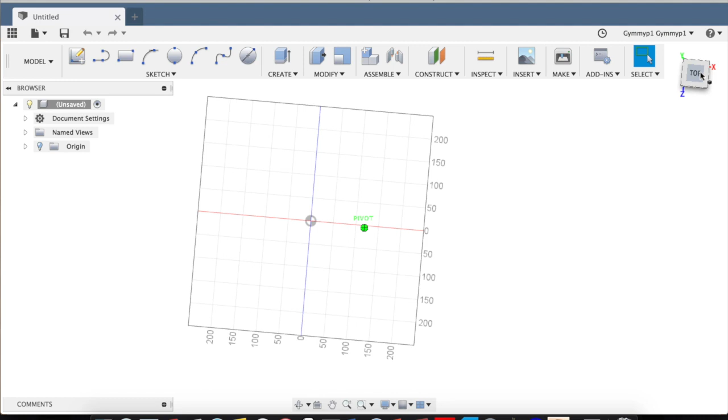So what I did was go on Kamui Cosplay's YouTube videos and take screenshots of the close-ups of her armor. So somehow we need to get the image of the armor piece that we need to make on here, so we can just trace out the shape.

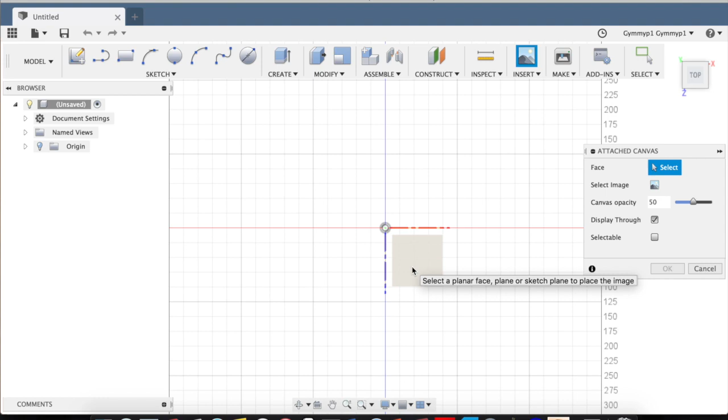So what you can do is go up here to Insert, and then Attached Canvas, and then you select which dimension you want it on, or plane. So I usually just do it from the top here, and then you go to Select Image, and I have it under my pictures, and then I have a whole folder full of these.

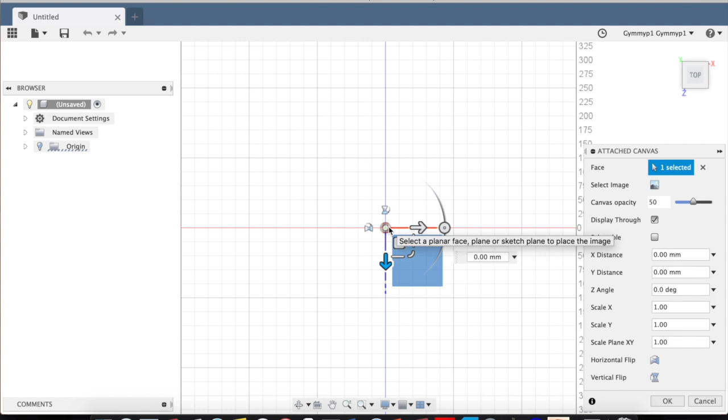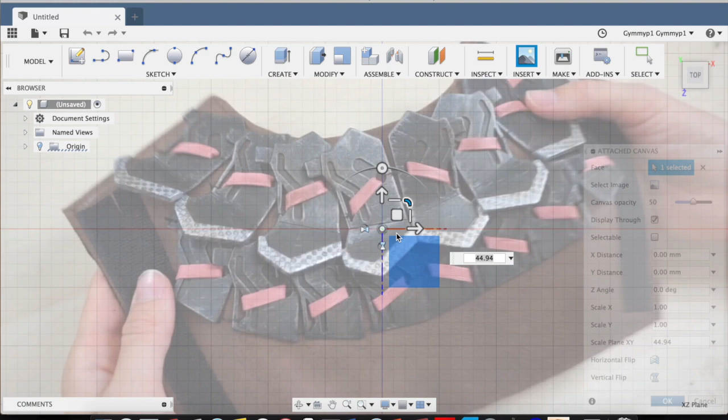So let's start, I started with the neck piece, because it was fairly easy to do. So you can see our image is right here. Usually I have to rotate it to be facing the right way. And then I use this little diagonal button to expand it larger. So from here, you can either decide to scale it to what you want, or you can just blow up the picture big and model on that, and then scale the piece afterwards, which is what I did. It's probably not the best idea, but it works in the end. So once we got that, just do OK. And now we have a picture to model directly on.

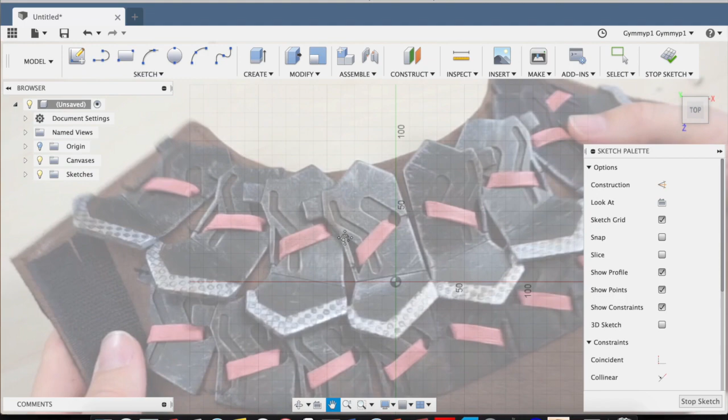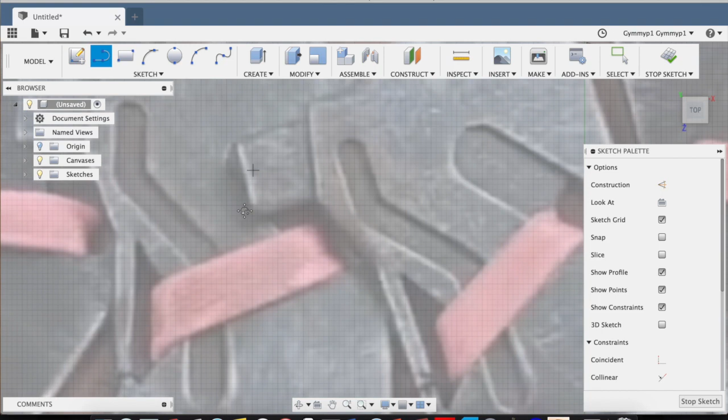So now what we want to do is trace out the 2D image of what we want. So go up here to Create Sketch. We want it on this plane. And then I'm going to zoom in on here. So we have several tools, the line, rectangles, circles, arcs, everything you could need. Spline is helpful for like freeform curves. But for here, I'm just going to do a line since this piece has very straight edges.

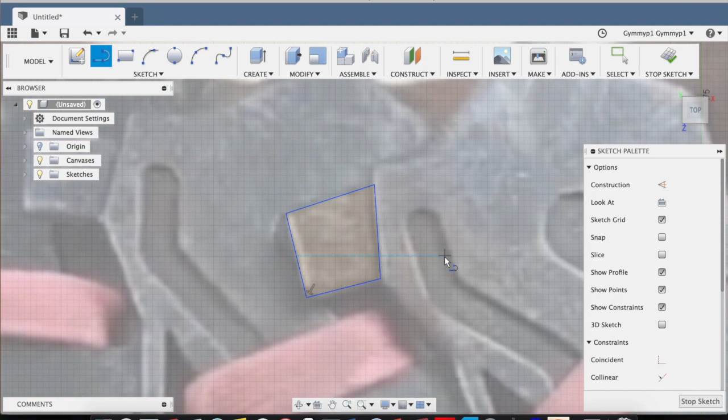So what I'm going to do here is just trace out the image here, and as you can tell, this is open-ended and it'll not show anything, but once we close it, it turns orange. And that's what we can, it's called extrude. It's turning this 2D shape into the 3D shape, like giving it height. So here we're just gonna continue to trace this out.

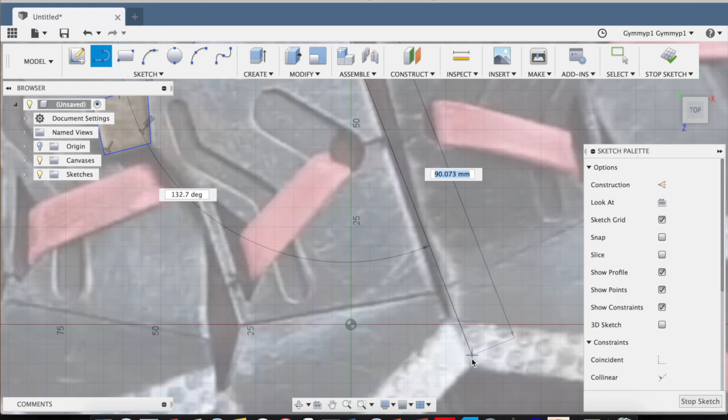And it's okay if it's not completely perfect. You can kind of tweak things later. And do that.

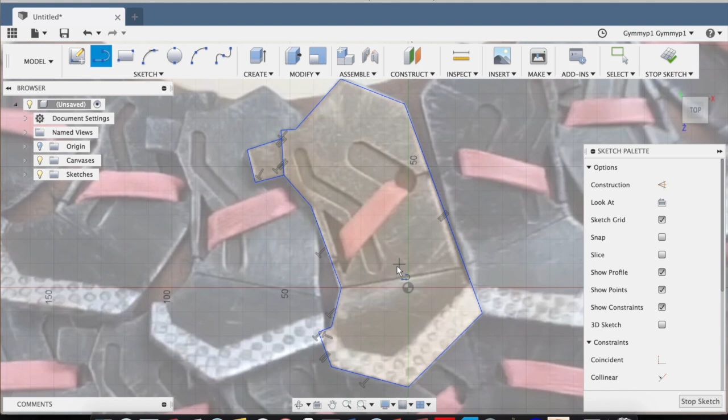And then that is a closed shape. That's why it turned orange. So you can do stop sketch. And this is just our basic shape.

But what I'm gonna do is go back into the sketch. So here is where all your sketches are, and that highlights which one. And then we right click on it and then edit sketch.

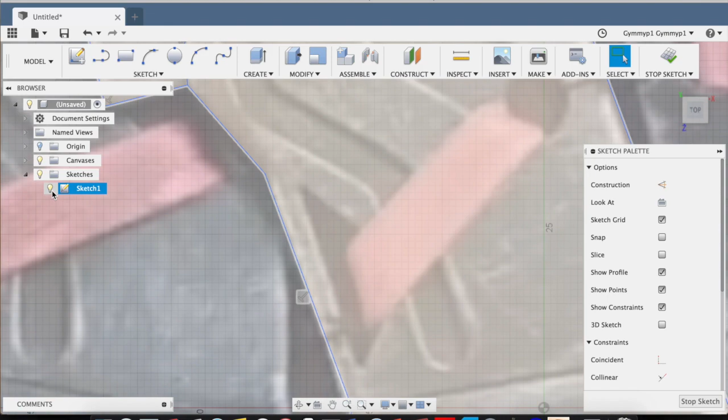So now what I wanna do is, I'm gonna turn that off, is outline all these indents and holes. So I'm just gonna, I need that on so I can connect that.

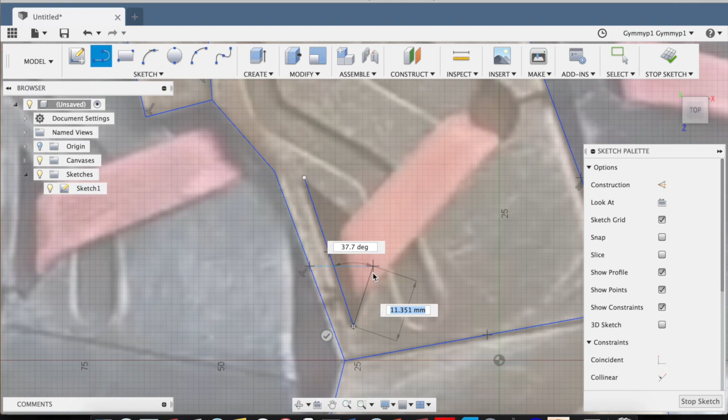I need that line. I need this hole. I'm just kind of guessing here, but that's just gonna be covered up anyway. And close that.

Let's see, I'll do that later. I'm gonna do a line right there. Oh, and if you need to escape, if you need to cancel that line, just press escape. Do that.

And just kind of fill in wherever you see straight lines.

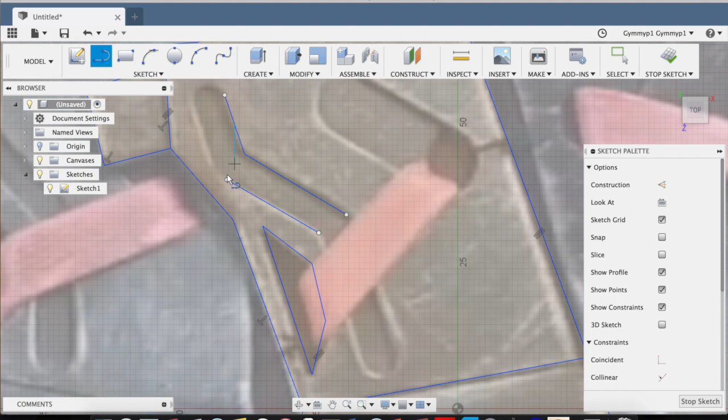Oh, this is riveting. Riveting material.

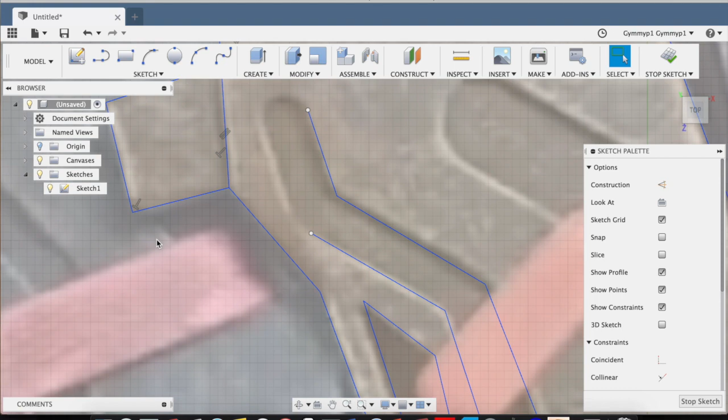It's kind of a tedious process, but once you've done it, it's done, and you don't have to worry about it anymore. And what is also awesome about this costume is that once you've done one piece, you can just flip it, and that's the other piece, because there's like mirrors of each piece, so everything's symmetrical.

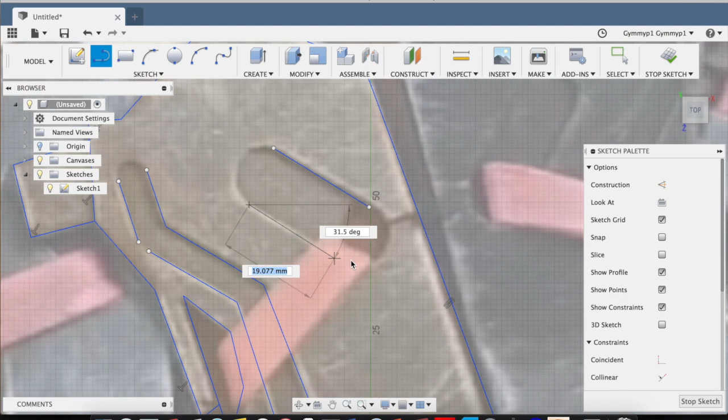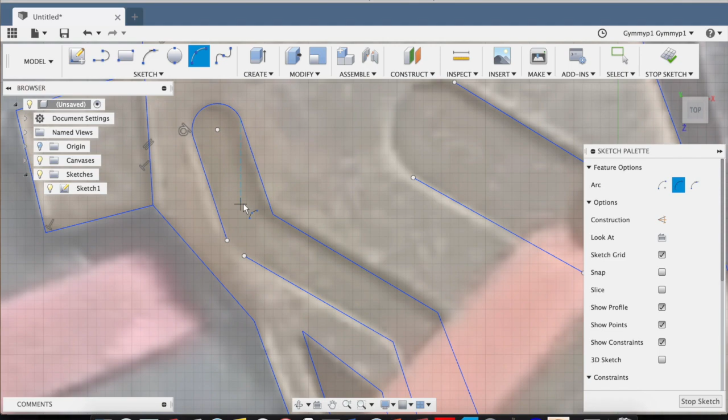Okay, so now what we need to fill in is these curves right here. So what I'm gonna do is the 3-point arc. So you select your first point, your second point, and then you drag it open to determine the direction of your arc. So this one might work here.

Yeah, I'm just gonna do that. And then I need one here.

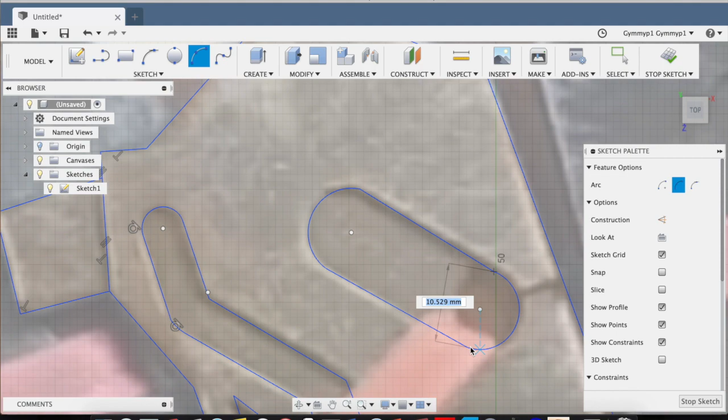Here, let's see. I could either do a circle or 2 arcs. I'm just gonna do 2 arcs since I'm already in the tool. I'll do one here, here, and do that.

And then I saved that line so I can directly connect it here. Let's see, and then we need an arc here.

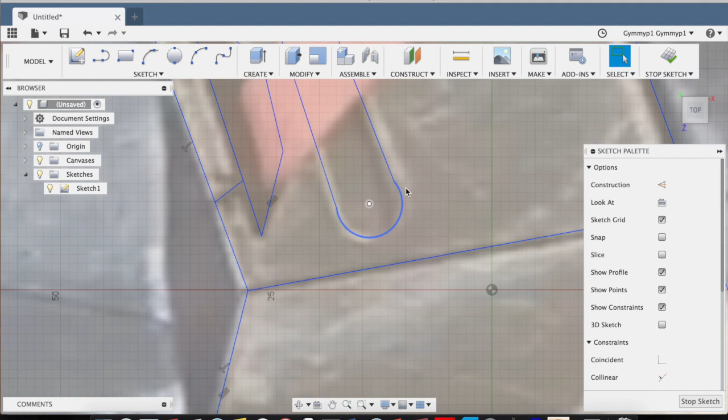Oh, that looks kind of wonky. So if you end up doing something like that, you can either undo or you can just drag this little point and kind of fix it up so it's not lumpy.

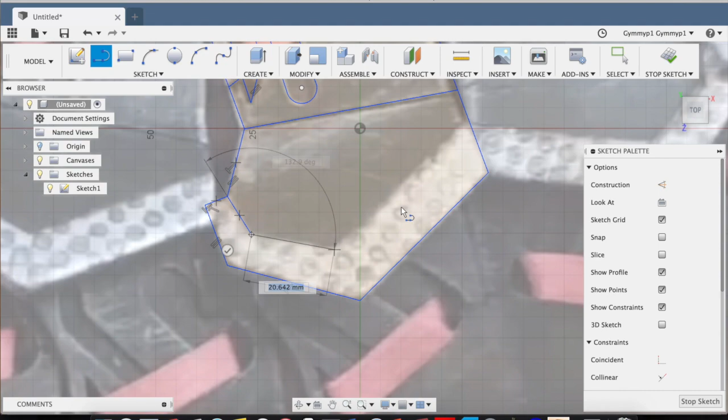Yeah. Let's see. Okay, so now we need to make this little part, which is raised. So I'm just going to do lines here again. Here, and then connect that over there.

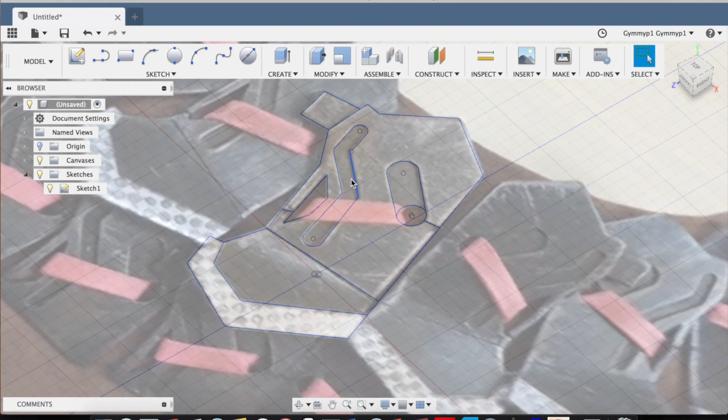All right, so that's our shape. We can go stop sketch. And now when we extrude, which is turning this flat shape into a 3D shape, it will come out properly and like have the holes cut out and everything already.

So what we want to do is click on one of these where it highlights it, and then press E for extrude. And then you can see this little arrow. You can just drag it up, and there is your 3D piece.

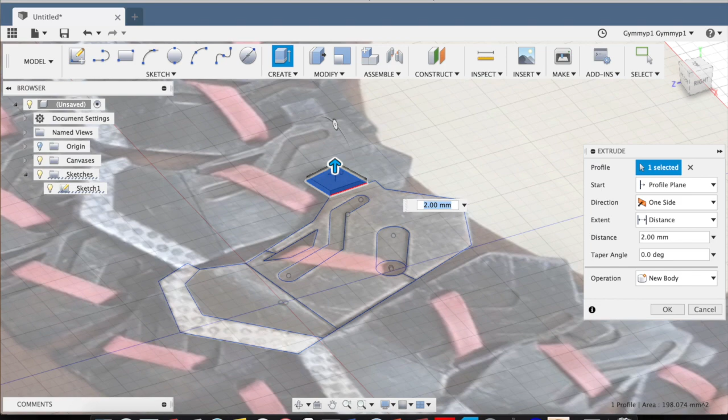So that's probably too thick. You can just go over here and do like, I don't know, 2. That is kind of a lower piece. If you look at the reference picture, that is kind of below this main piece. So we want that to be a little shorter.

So just do OK, new body. You have all these different options for more advanced stuff, but I didn't really bother with that. So I'm going to do OK.

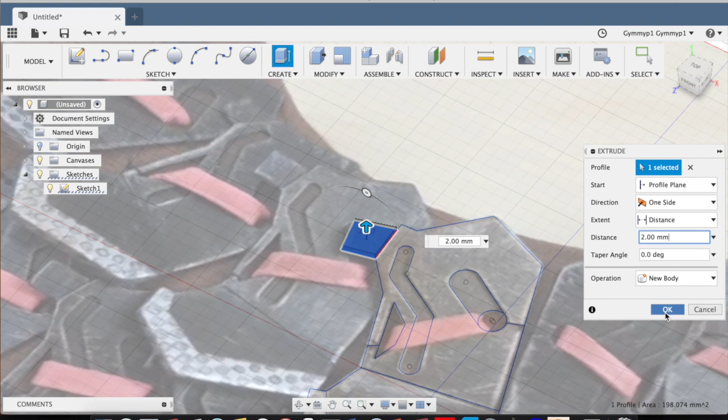And then you notice how the sketch goes away. You can just click the bulb and there's the sketch again. So we want to do, let's see.

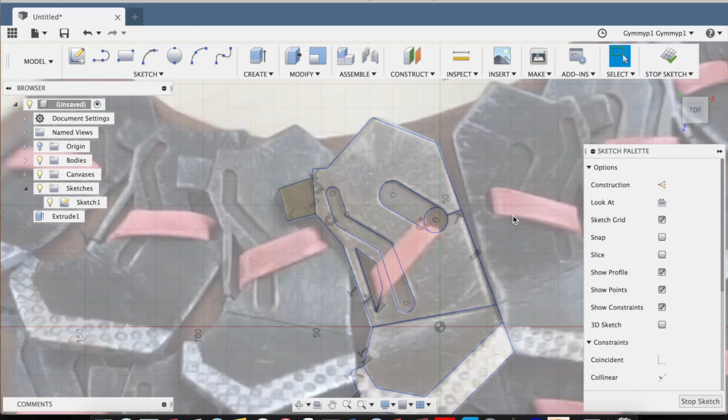Oh, okay, I forgot to add a line. Whoops. So I'm going to do edit sketch because this is a raised area right here, but the problem was that there's not a line right here. So I'm going to go ahead and stick that line in so it can be a raised section. Do this right here.

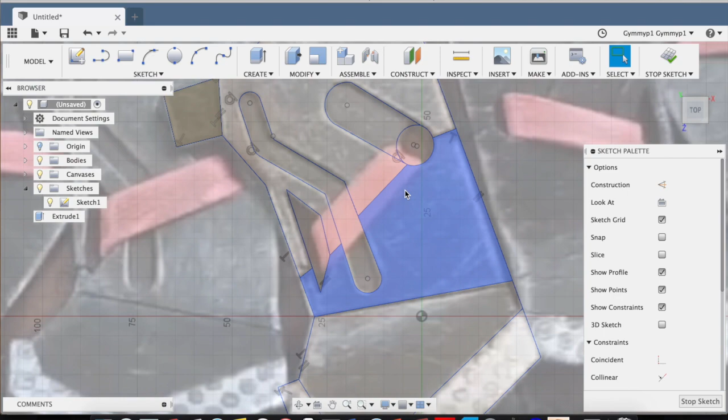And it can kind of go wherever since it's going to be covered up by that ribbon. So now it has those two sections.

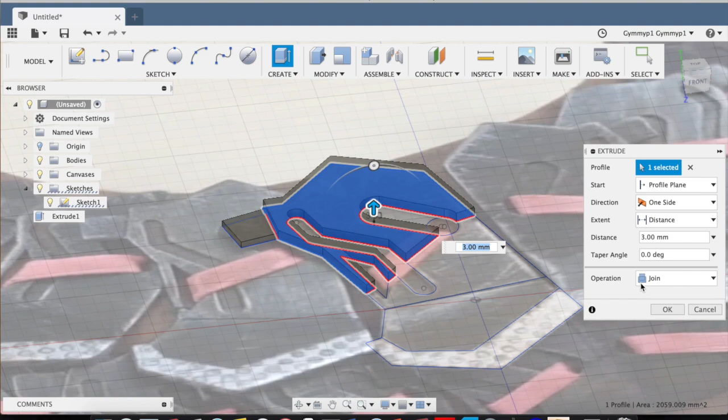So this one we want it to be a little higher. Click that region and then press E to extrude and drag it up. Even that looks a little too much. So let's see what 3 is. That looks about right. And then here it says join—we want to join because this is all going to be one piece. So I'm going to do OK.

This and this need to be the same height, so do the same thing again. You can also just go down here. This is going to be a little shorter than that other one, so I'm going to do like 2.5. That might be a little too close. So let's do 2. That looks about right.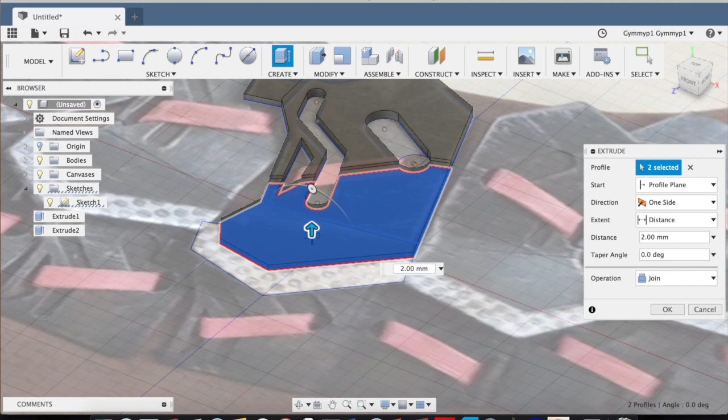And then this one needs to be the highest piece. So like maybe, what do we do on that other one? Okay, so that looks pretty good.

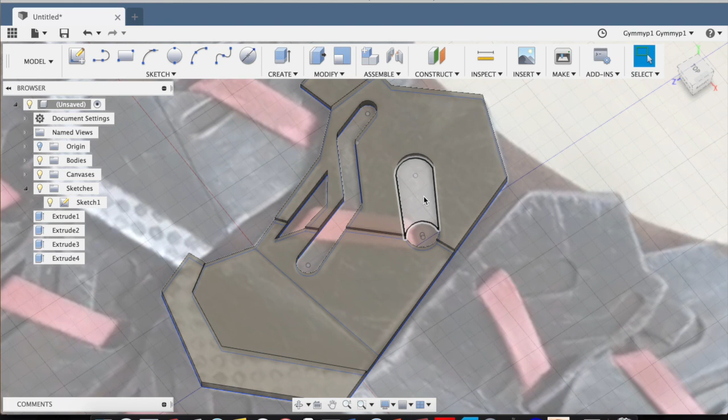I'll let that join. And these right here, so that was a hole—this right here is an indentation, and this is an indentation. So you can just select both of them, doing control and then click, or whatever it is on Windows, and then I have a Mac, so I do command and click multiple regions and just do that.

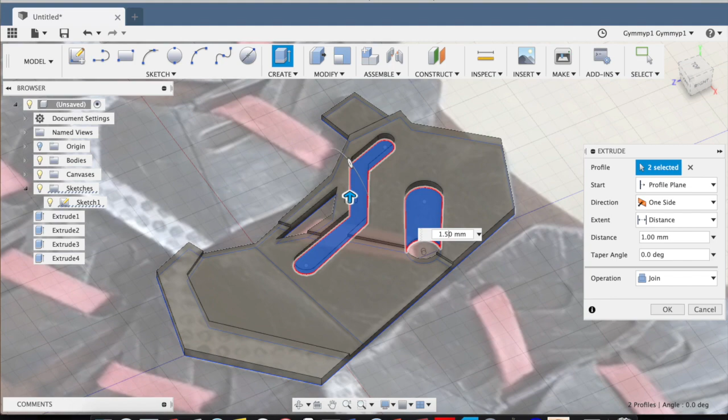Just try like 1.5. And once you've extruded that area, you can shrink it down or you can raise it up a little more too. So that looks like what we want.

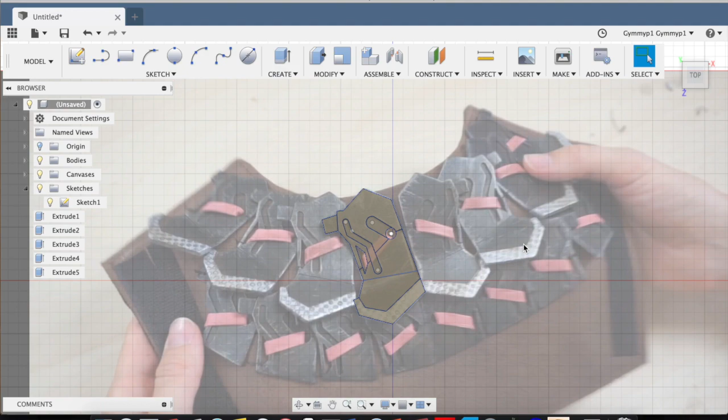Okay, so if you notice in the picture, if I get it oriented right, it looks like this part has an angle where it's kind of coming off, like where it's raised. And this, our piece right here, is completely flat. It's not fat, it's flat.

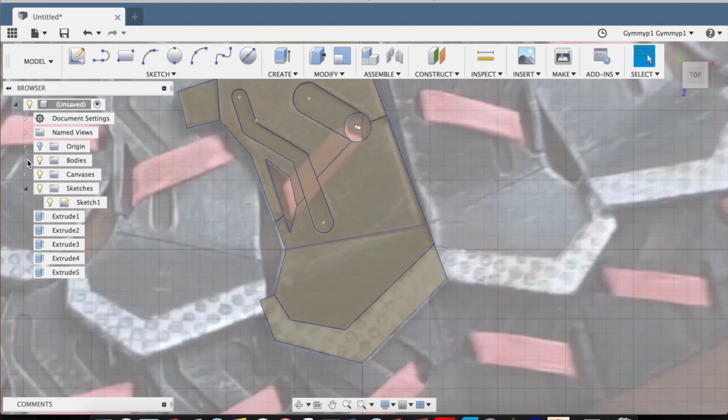So I have kind of a cheaty way of bending the pieces that I needed. What we want to do is a split body, which is under Modify and Split Body. But first we need to define at what line we want this split to happen. So we know this 3D piece is under bodies now, so just turn that off, and there's our sketch again.

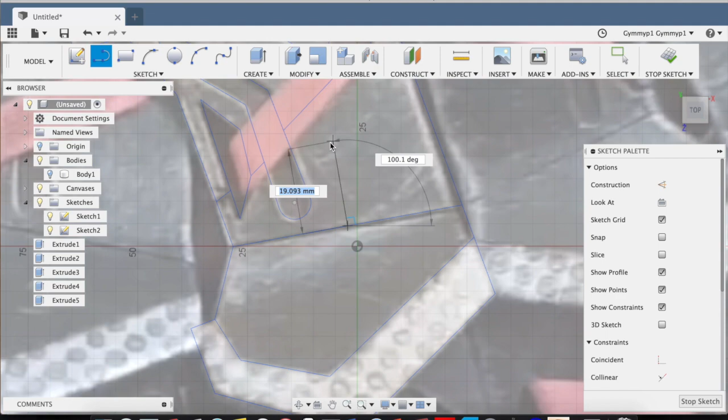So we know we want it to be split across this. But what we need to do is create another sketch, or you can just edit the sketch that's existing, but this kind of helps. Click on the line you want it to be split at, and then you want to do a 90-degree angle—you can see that little blue box right there, a 90-degree angle. And just get out of that and then stop sketch.

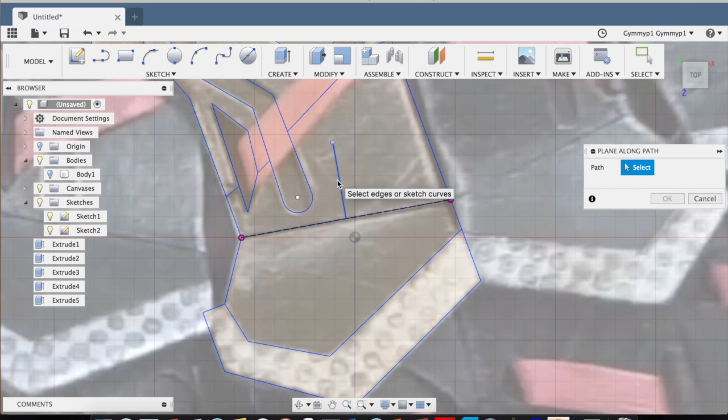And now you can go up here to Construct and do a plane along path. Then select the 90-degree angle line, the perpendicular line from the place you wanted the bend to be. See how there's that orange line? That's your plane you're going to cut at. I put it all the way where it's lined up with the line you want to cut at, and do OK.

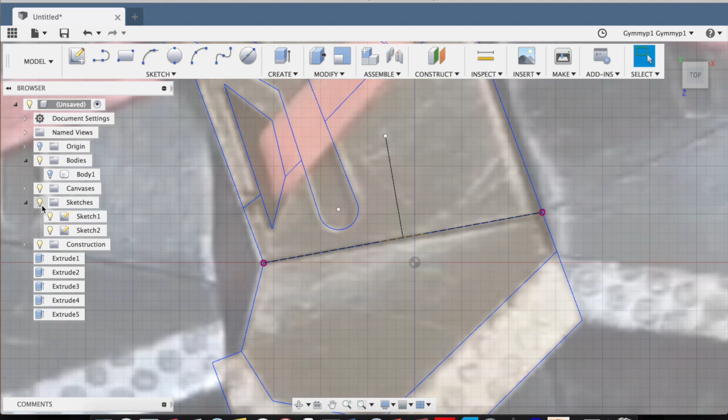And then I'm going to turn off the sketches so you can see where that plane is. So now we have this plane right here that we're going to be able to cut along. I'm going to turn that on—oh actually, no, I'm going to turn that off.

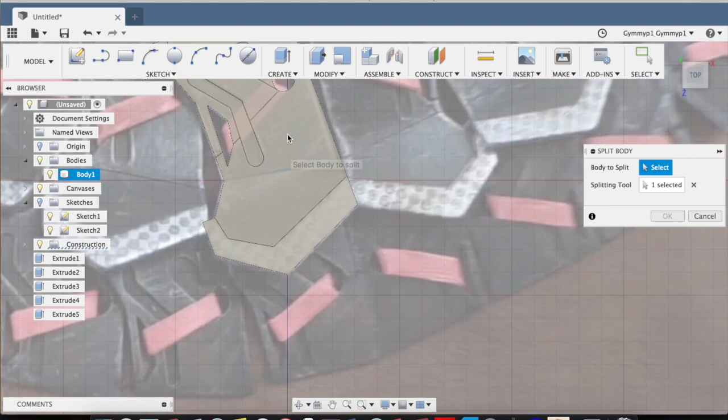So now we want to go up to Modify, Split Body, turn on your body again. Okay, we want to split this body, and for the splitting tool we want to select that plane that we just made. Right there—oh, I just deselected it. Okay, there we go, we want to cut along there. And then do OK, and now we have 2 bodies out of that one.

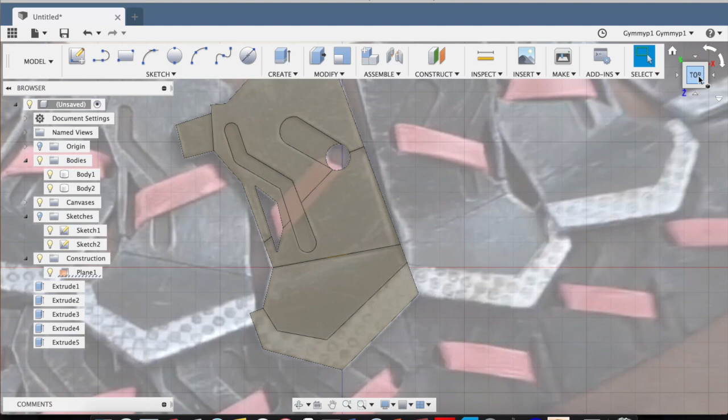So there's that one, and turn that off, and then we have this one. So what we want to do now is manually rotate this piece where it's kind of jutting out this way. So what I do is press M for move/copy, and then, let's see, rotate—I think it's this.

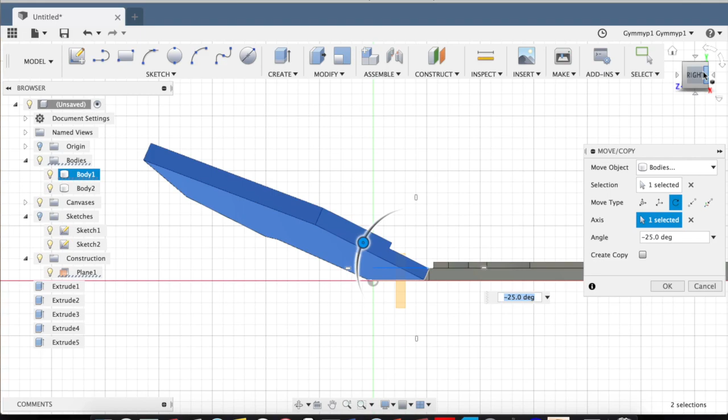There we go, that's what we want. So there we have rotated it so it has that angle. And put it down just a little. That's a little too much. Maybe just down slightly more. All right, so that's what we want.

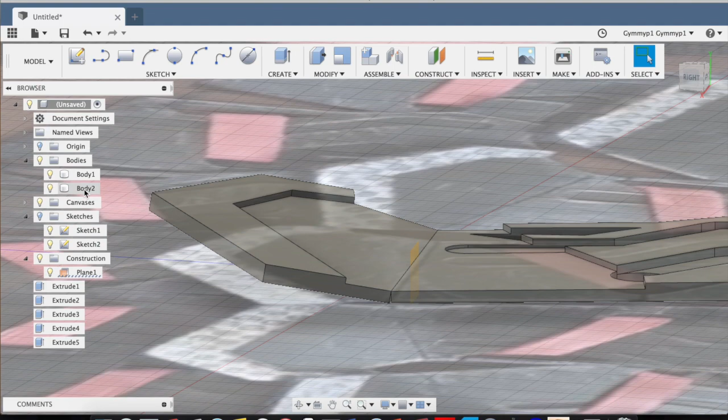Let's see if this works. So now we have our piece, but the problem is these two pieces are not joined anymore. So what we want to do is join them again. See how there's this little gap? We need to join that together.

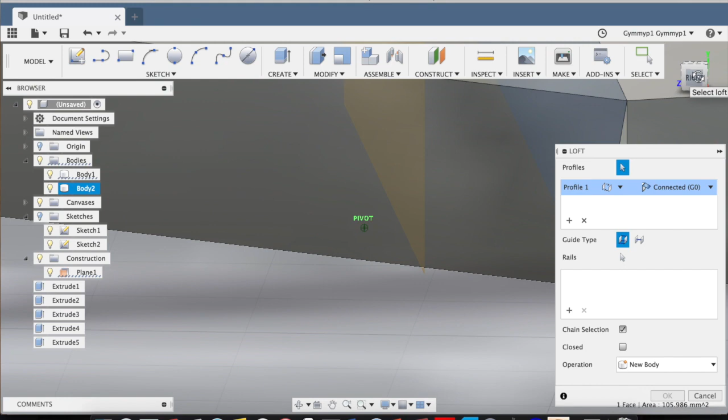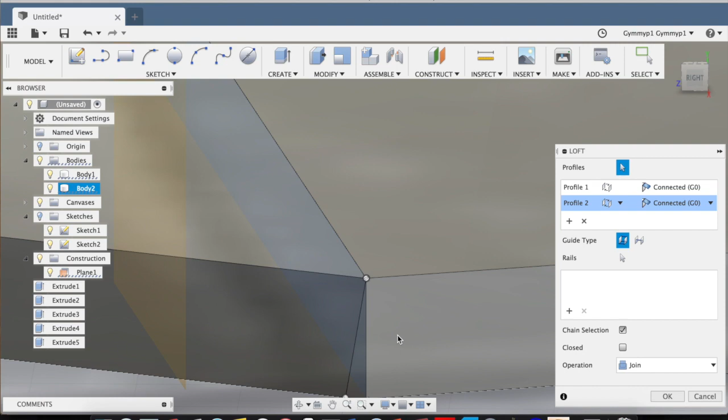So there's this handy little feature called Loft, which is under the Create menu. What you want to do is select the two faces that you want to join. This is kind of hard to see, but basically it's where the gap is, and see how it automatically connects. Just make sure it says join. Sometimes it'll give you an error if things aren't lined up right, so just fiddle around with the rotate and make sure there's a proper space between it, and do OK.

And now we have our finished piece, and it's all one piece again, and it has our little angle that we need. So now we can export this.

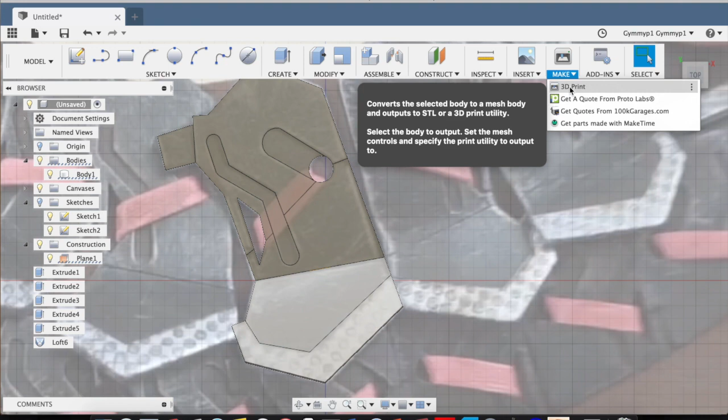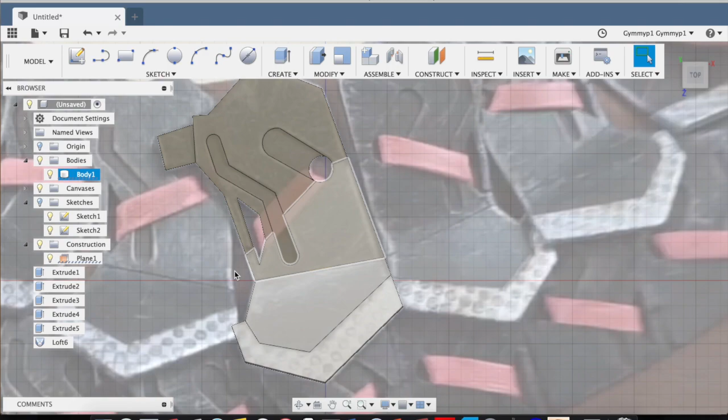So you can go to Make, 3D print. We need to export this whole piece. Either you can do that, or I just usually save it as an STL file wherever. I'm going to put it on my desktop and call this neck piece, because neck would be weird. Just do save. Now I'm going to go over to Cura, which is my usual slicer.

Go to Finder, and then find that piece, and drag it in, and there's our piece. And it's obviously way too big.

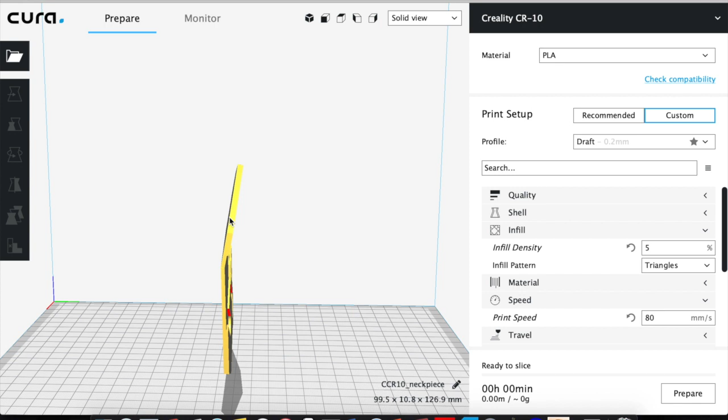What we're gonna have to do is scale it. Let me do this. So that's what it's gonna look like. Obviously that's too big for the neck piece. So what I would do is go back here and then press S. Well, all right, we're gonna have to do it the hard way.

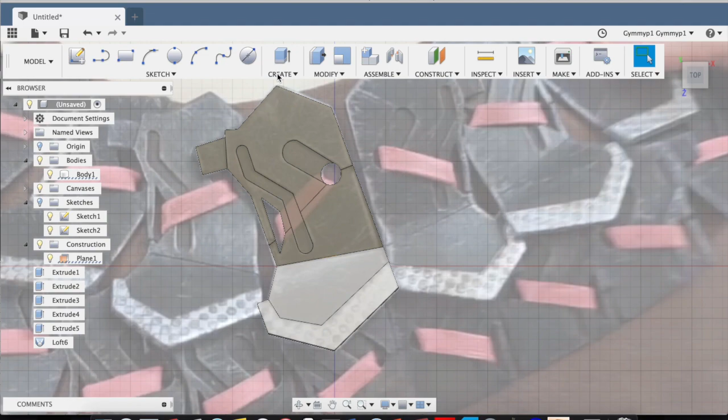So what we're gonna do is go back here and then go to Modify and then Scale. Click the body that you want to scale. And then, oh shoot, okay, maybe try it this way. So that's obviously a lot smaller.

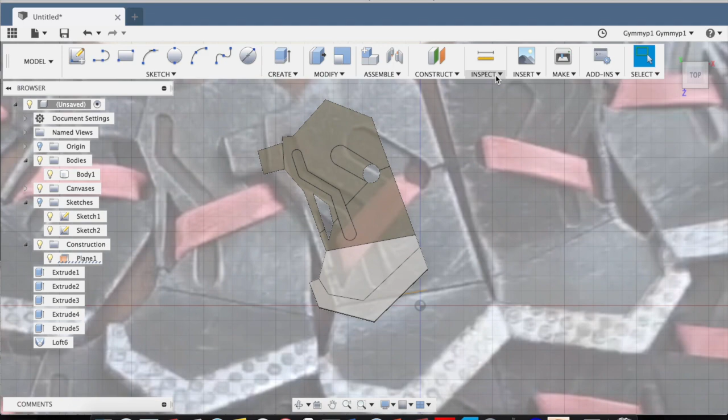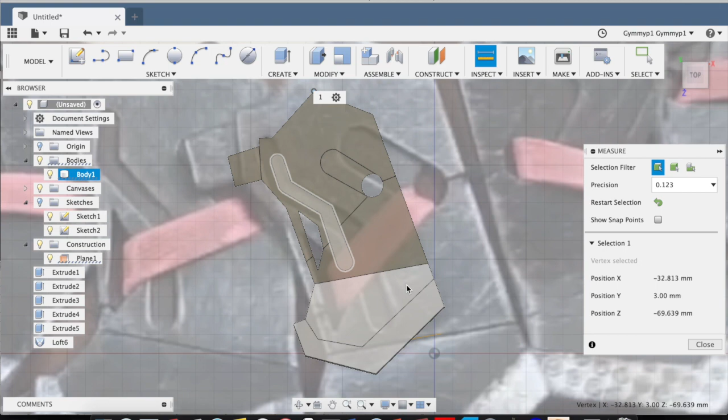To measure how big it's actually going to be in real life, you can go to Inspect, Measure. If you read my write-up for my Thingiverse listing, I said to do paper dummies to make sure all your pieces are scaled right to your fabric bases. So hopefully you already have that paper dummy, and you can just do a point and a point, and that's 77 millimeters, which you can convert to inches or centimeters or whatever. But that will be your piece.

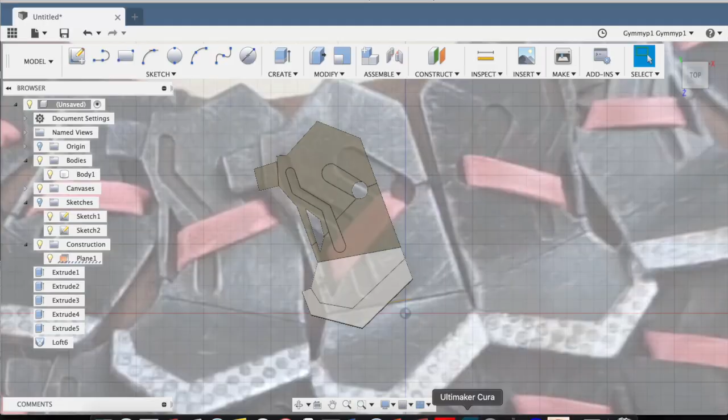You can either make a mirror in Fusion, or just go over to Cura, or your slicer, and click on this. It has a mirror function, and there's your mirror. You can prepare, and just save it and send that to your printer, and you're done.

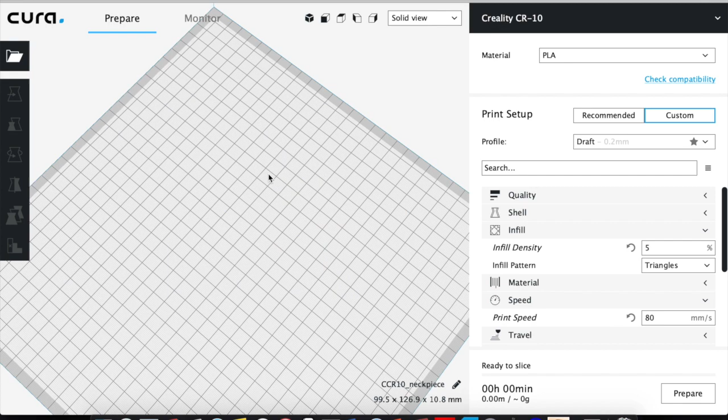So I hope that was a somewhat clear explanation of what I did. I basically used this process for basically all the armor pieces. Thankfully none of the armor pieces were really complicated. I mean, the chest piece was a bit, but it was all just layers, just like this, just on a much larger scale, I guess.

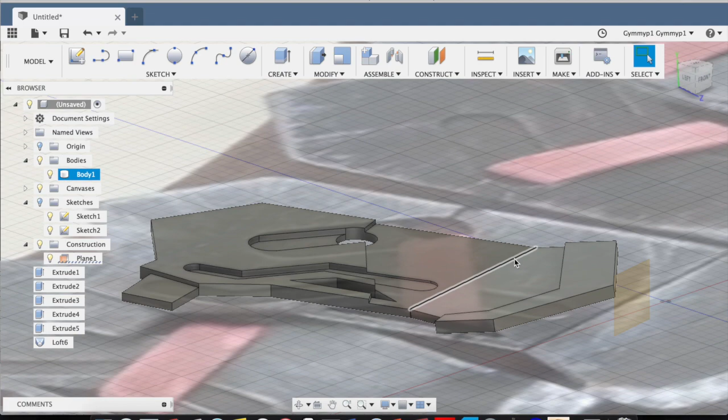But yeah, just play around in Fusion, watch video tutorials if you run into a certain problem. You can always contact me.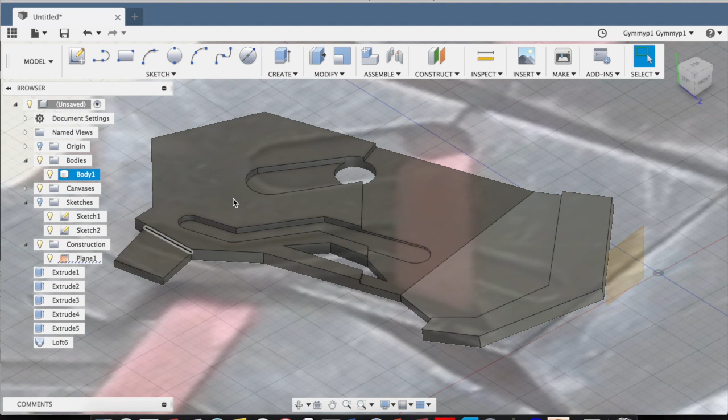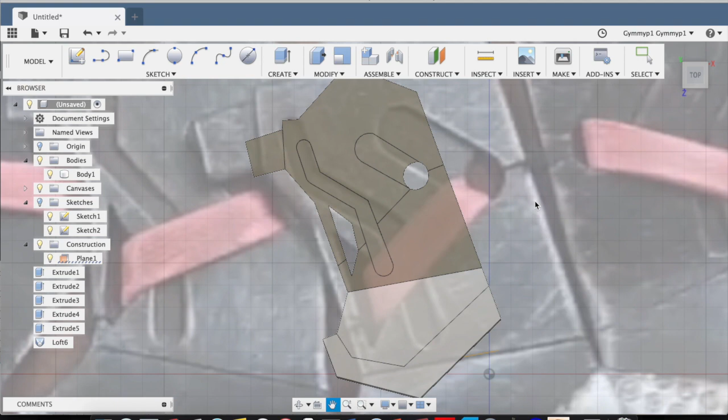I am not an expert at Fusion at all. I am pretty much a novice, but I pretty much figured out what I needed to do for this application, and that's it. But yeah, I hope this was helpful, and I hope to put out another video about possibly the cosplay itself, but who knows if that's going to happen. But yeah, thank you for watching. Bye.